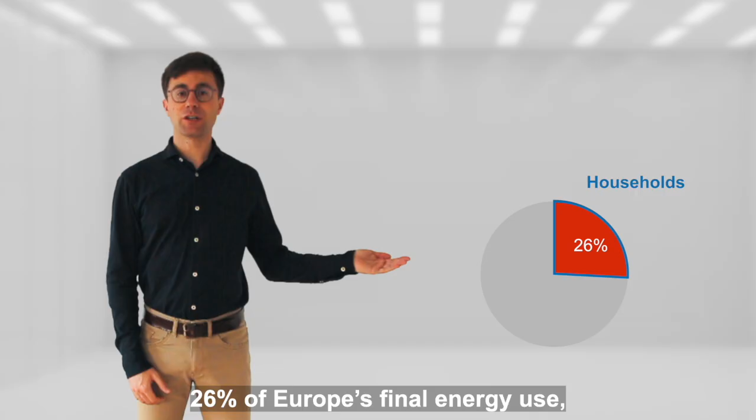What should we do? It's not the first time you get this question, and luckily, after 3 years of PhD, you have some answers to help them out. But first, you reassure them. Their actions do matter. Households are responsible for 26% of Europe's final energy use, of which the majority is for heating, so space heating and domestic hot water.

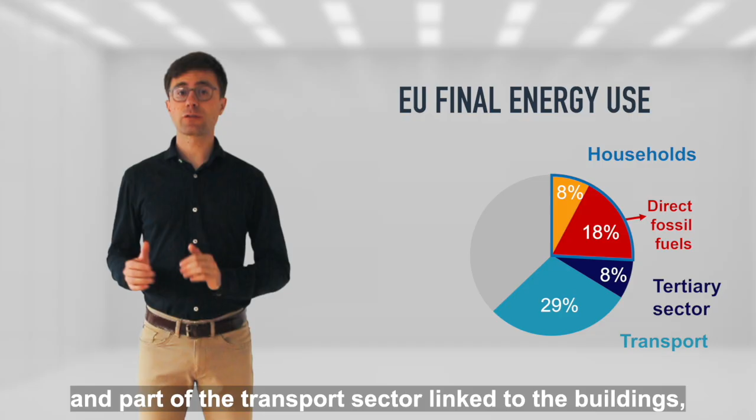In fact, 18% of Europe's final energy use comes from the direct fossil fuel combustion in households. And if you include the tertiary sector and part of the transport sector linked to the buildings, that number is even higher. So, replacing fossil fuels in your own house really makes a difference.

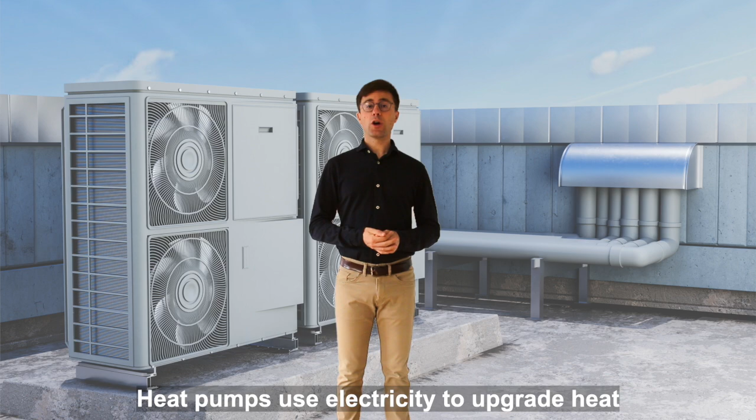Luckily, many energy technologies already exist. Solar panels and solar thermal collectors can harvest solar energy to produce electricity and heat respectively. Heat pumps use electricity to upgrade heat from the air, water or ground. Batteries allow for storing renewable electricity for later use, and big water tanks serve as a thermal storage.

On a larger scale, wind turbines generate electricity, and in transport, electric vehicles are stepping in to replace traditional combustion engine cars. However, the big question remains: what should we install given our two main goals? First, we want to reduce our climate impact, and second, we want affordable solutions. So, we are looking for the solutions with the lowest CO2 emission reduction cost.

Fortunately, we can rely on our simulation-based integrated strategy. By combining models of the energy system with optimal control, we can compare the CO2 emission reduction cost of different energy systems in a fair and consistent way. Let's start with the models, and we begin with your house.

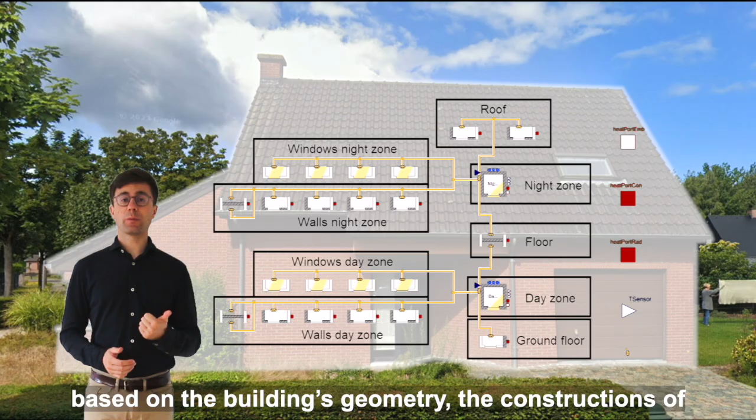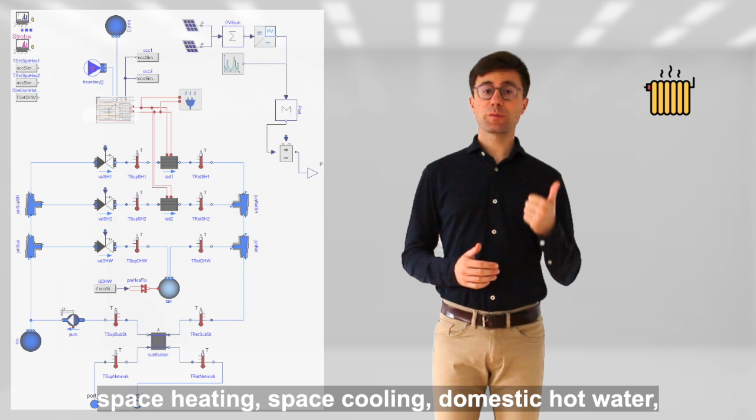We model the building as is, so we make a mathematical description based on the building's geometry, the constructions of the walls, the floors, the roofs, the windows, and the physical properties of the materials. Next, we connect the building to the energy system, and this includes everything to supply space heating, space cooling, domestic hot water, and electricity for the plug loads or electrical appliances.

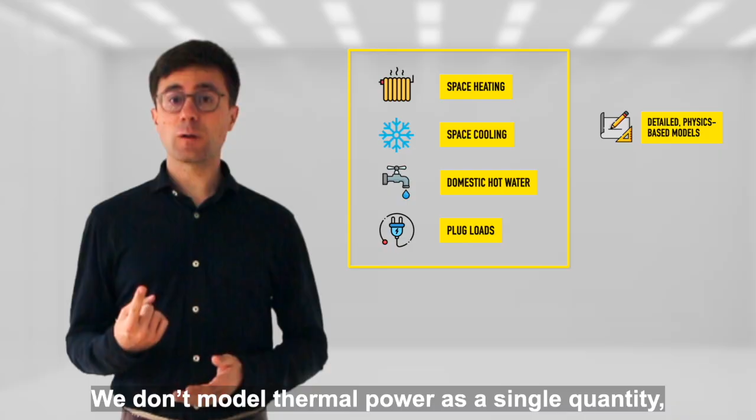We model all energy services because we want to incorporate the synergies between all energy carriers. We use detailed and non-linear physics-based models to capture the real behavior of the system. We don't model thermal power as a single quantity, but instead we model mass flow rates and temperatures, because a thermal power at the wrong temperature is useless.

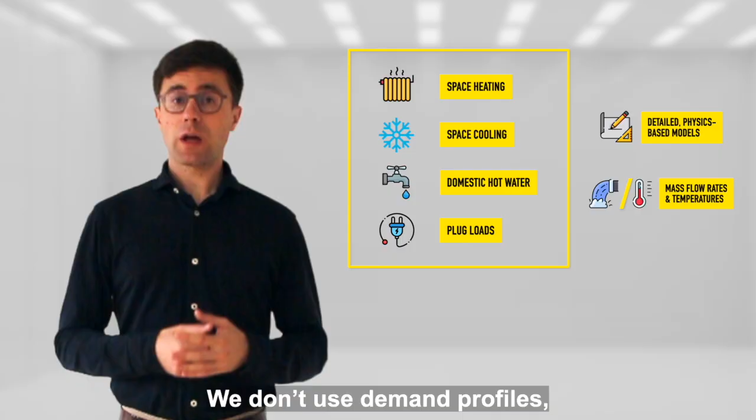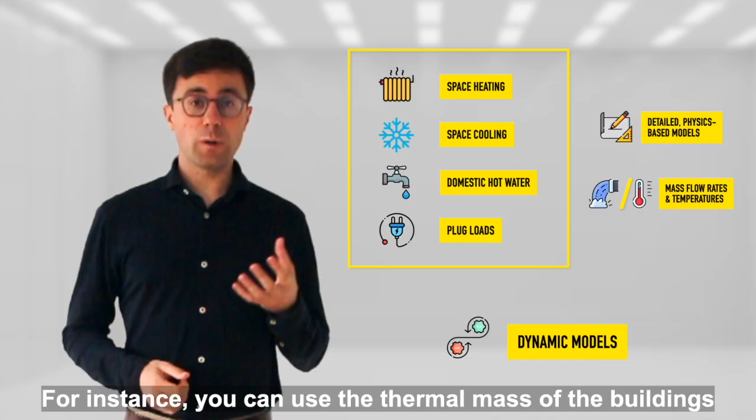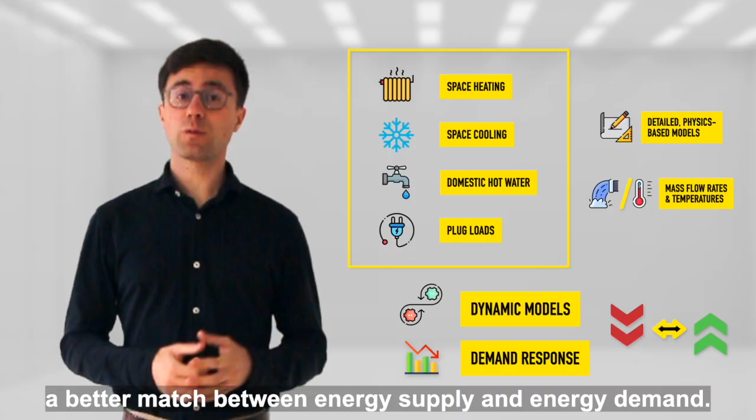We don't use demand profiles, but we use dynamic models to exploit all flexibility in the entire system. For instance, you can use the thermal mass of the buildings or the water in the hydronic circuit to shift demand in time. This is known as demand response and supports a better match between energy supply and energy demand. Many of these key aspects are simplified or neglected in the state of the art.

To operate the system, we integrate an optimal predictive control strategy that takes the future into account for the current control actions.

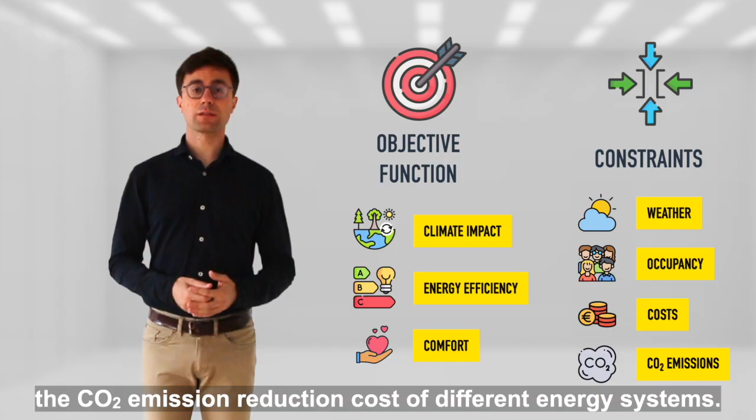The optimal controller minimizes an objective function while taking into account the constraints. We minimize climate impact and maximize energy efficiency while maximizing comfort for the occupants. After adding information on the boundary conditions, we can perform annual analyses and compare the CO2 emission reduction costs of different energy systems. Let's take a look at the house of your aunt and uncle.

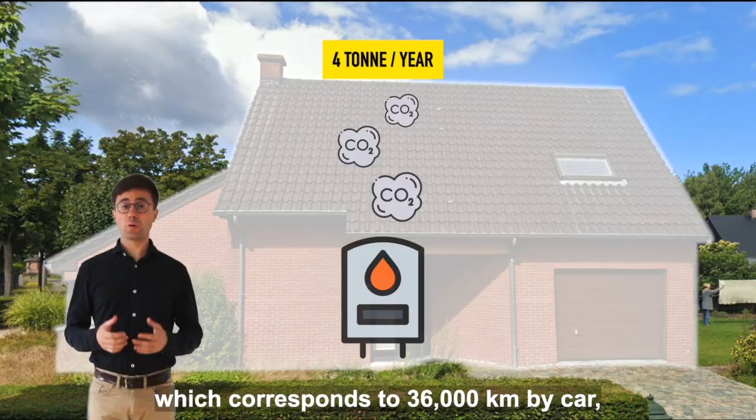They still have a gas boiler in place for space heating and domestic hot water. The boiler emits almost 4 tons of CO2 per year, which corresponds to 36,000 kilometers by car, or the CO2 absorption of 180 trees. Only a minor part is linked to the electricity consumption. For this system, they pay around 3,500 euros per year, including the annual investment cost for the entire system with a small solar PV installation.

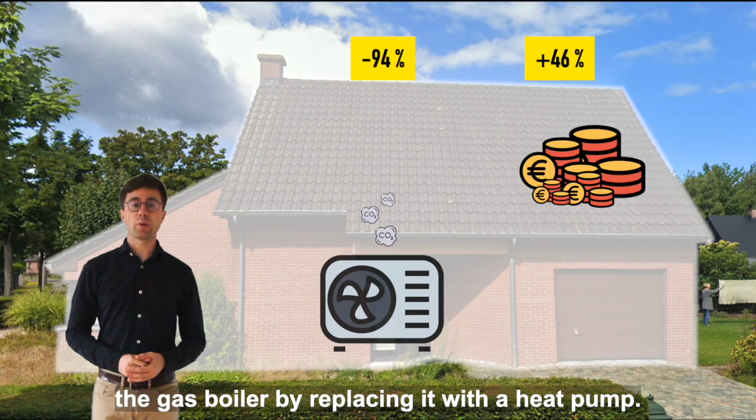So, the first step is to eliminate the emissions from the gas boiler by replacing it with a heat pump. This switch reduces emissions by 94%, but also increases costs by 46%. Combining this emission reduction with cost increase leads to an emission reduction cost of 420 euros per ton of CO2 reduced. Unfortunately, the annual investment costs have increased significantly, but fortunately, collective systems can offer benefits for this.

Your aunt and uncle could collaborate with their neighbors in a small energy community by installing a collective heat pump and sharing the heat via a district heating network. In this energy community, the shared investment leads to much lower costs, bringing down the emission reduction cost to 180 euros per ton of CO2. That's why I strongly recommend considering a collective solution with your neighbors.

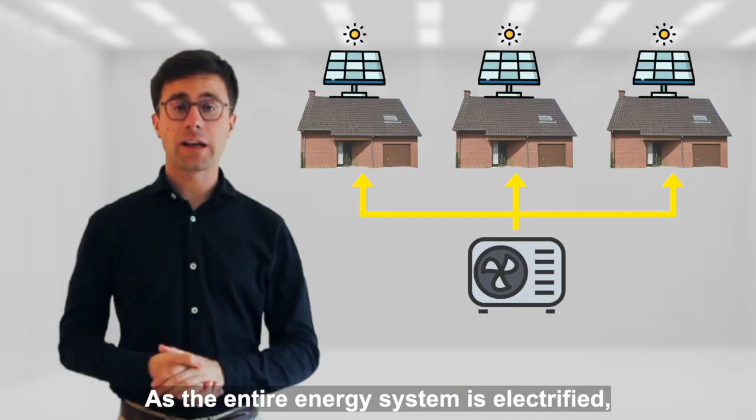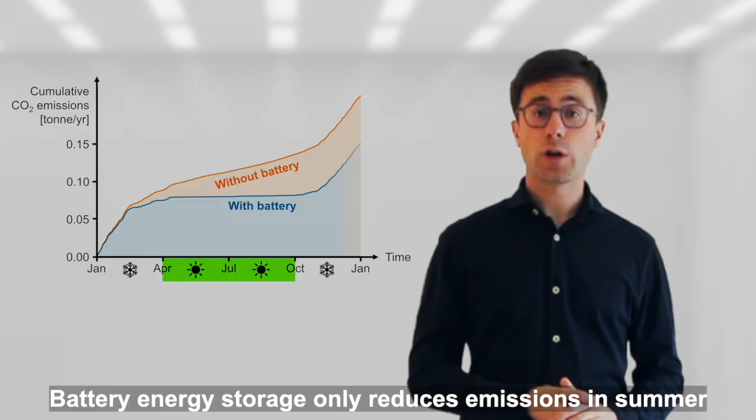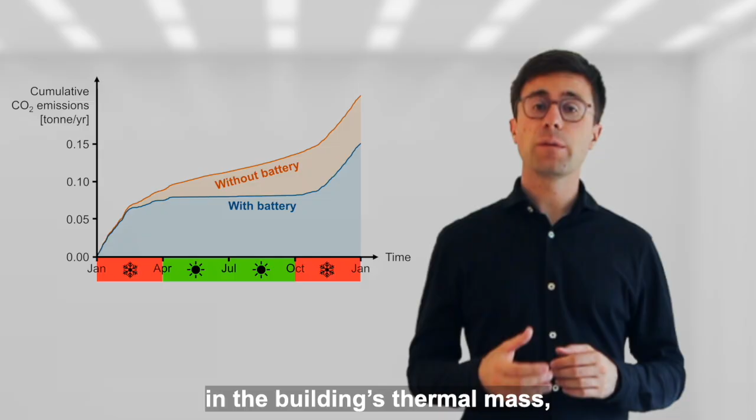As the entire energy system is electrified, battery energy storage seems an interesting technology to store excess renewable electricity for later use. However, the opposite is true. Battery energy storage only reduces emissions in summer to cover the plug loads during nighttime. In winter, there is less excess renewable electricity, and if there is, it's stored immediately in the building's thermal mass thanks to the optimally controlled heat pump. This way, energy losses in the battery energy system are avoided.

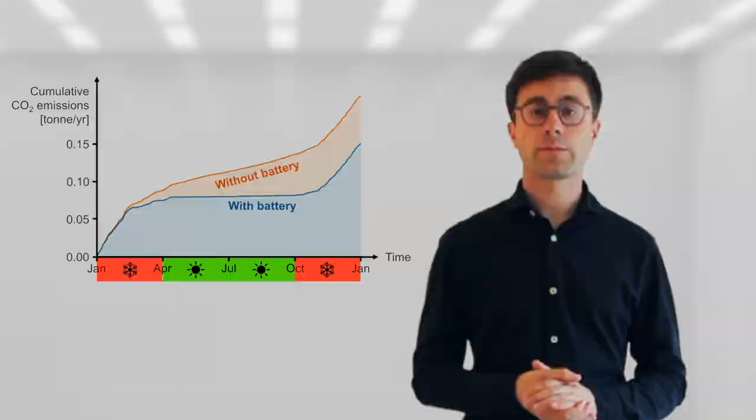This effect only becomes visible when we use dynamic, flexible building models instead of static, predefined demand profiles. We have compared both approaches, and in the case of static demand profiles, battery energy storage appears more interesting, simply because it's a sole source of flexibility. The very small emission reduction in absolute terms and the high investment of battery energy storage lead to an emission reduction cost of 5,130 euros per ton of CO2, which is more than 10 times the emission reduction cost of electrifying a gas boiler.

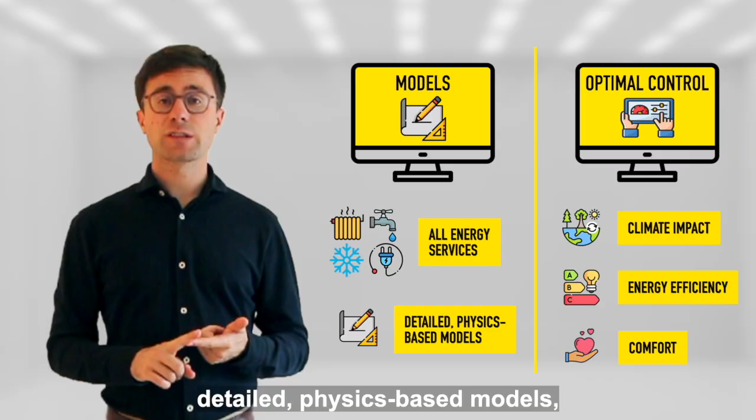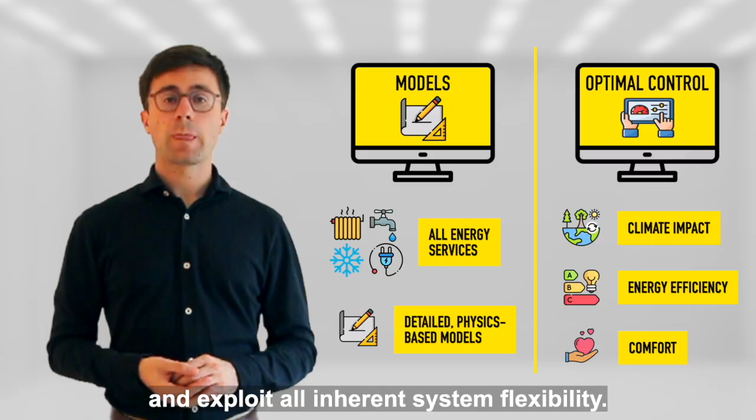Aan tafel! The food is ready and everyone is hungry. Of course, there is much more to tell about, but for now you make your aunt and uncle happy with 2 take-home messages. First, we have a method that allows us to easily model and compare different energy systems. The method includes all energy services, detailed physics-based models, and an optimal predictive control strategy to capture the system's real behavior and exploit all inherent system flexibility. This approach can support an effective energy transition.

Second, the gas boiler is responsible for most of your emissions at home. So electrifying heating with a heat pump is the first step to drastically reduce your CO2 emissions and the local emission of pollutants. If you collaborate with your neighbors in an energy community, the emission reduction cost comes down to 180 euros per ton of CO2 reduced. By the way, this cost is in the range of the expected emission tax Europe will implement in 2027. So, a collective heat pump is a future-proof track. The path is clear. Electrify, collaborate, and make the future happen together.